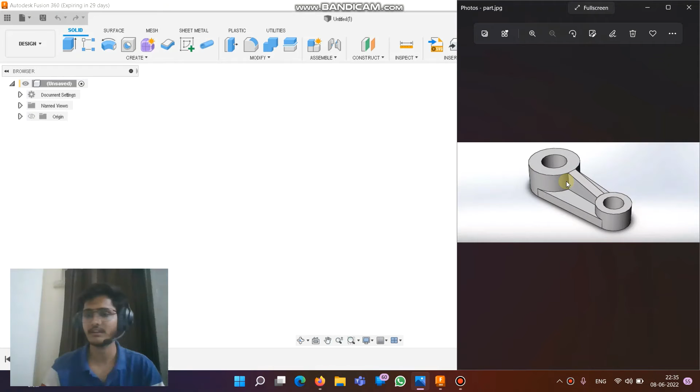Let's start by selecting the top plane in which we need to draw two circles. I am taking random dimensions for this tutorial.

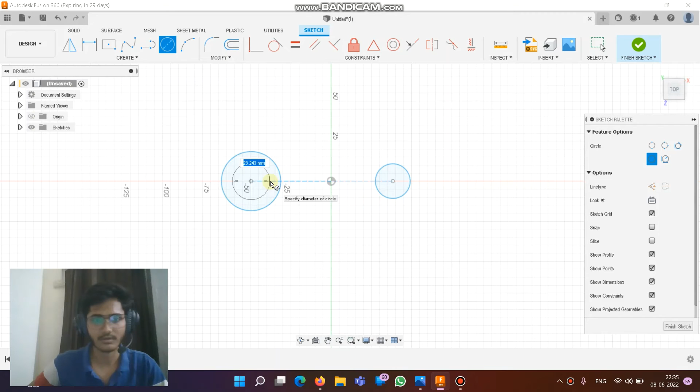Okay, and then we need to connect it with the rib, which we can use a center point rectangle, like this. After that, I'm going to give dimensions to these.

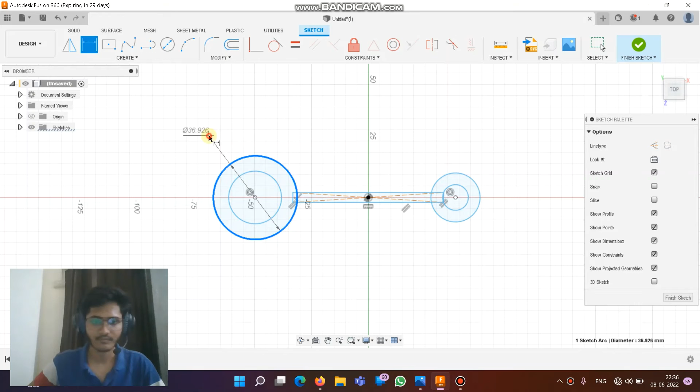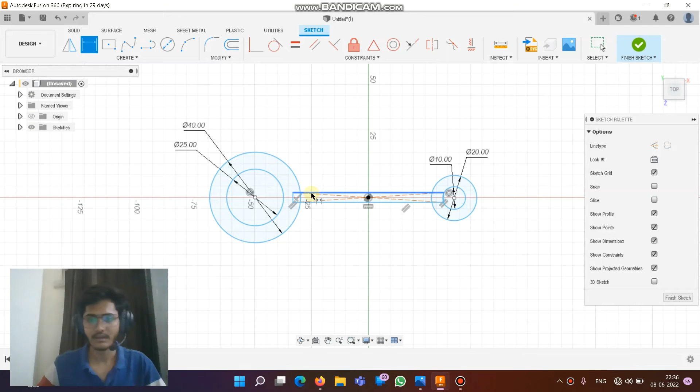Circles. It is close to 40, and I can give a dimension of 25. This one 20, and this one of 10. After that, it can be 65.

It's awesome. And then we need to connect these two circles tangentially. Perfect.

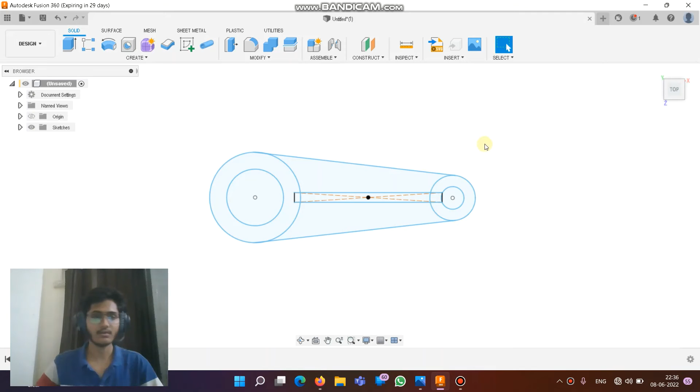Now as we look in our design, we need to extrude it.

First I will extrude it to a height of 15 millimeters. Go to sketches, highlight your sketch again, then extrude the smaller circle up to a height of 10.

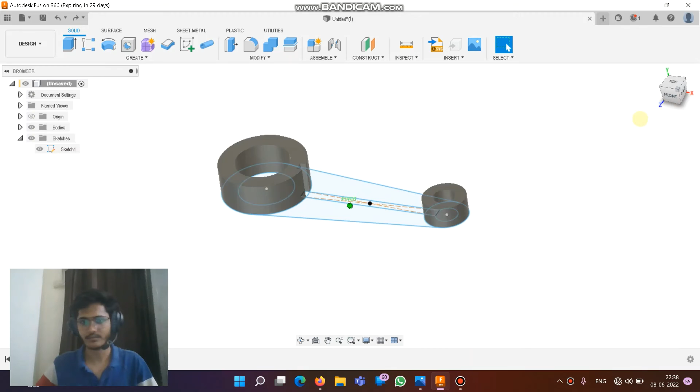Okay, 5. And after that we will create the middle rib connecting both circles. Select the rib sketch.

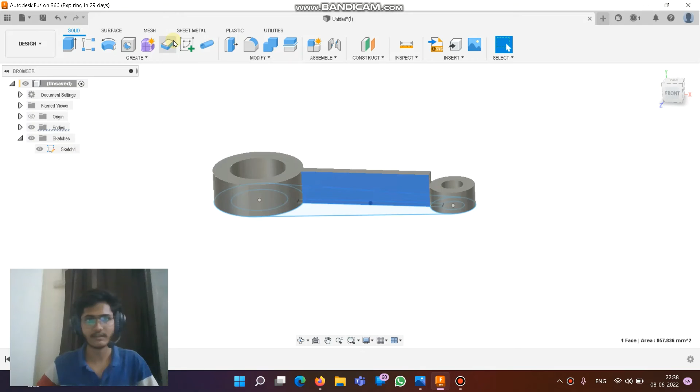Extrude it up to a height of 15. Edit, select this plane, edit it, join these 2 points. This will create a separate section which we can just select and cut it out.

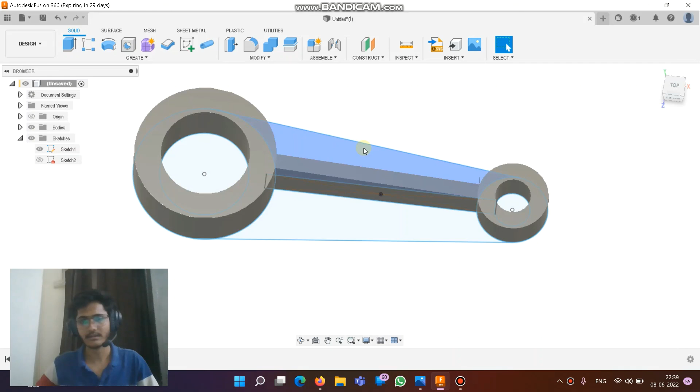Okay, then for the remaining small extrude height, select this and this, extrude it up to a height of 5.

Now you can see our part is ready. Hide your sketch, everything else. Our part is ready.